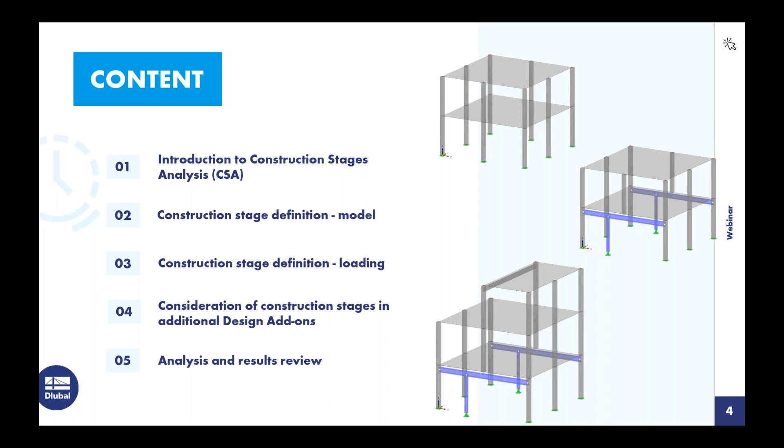So we might be wondering, why would we want to consider stage construction? Well, we know during the construction process that the structure may actually pass through several loading conditions that vary from the completed structure. For example, when we're talking about multi-level story buildings and adding each additional level on top of each other, the previous level is already undergoing deflections and stresses. So if we look at the building on the right-hand side, we set up our formwork for the first level, let the concrete cure, remove the formwork, and move on to the second level. That first level is already undergoing some of these deflection stresses from self-weight alone, or maybe some additional construction loads. So we'd like to take those into account with stage construction.

Now, regular simple structures may see very little difference when we compare the stage construction to simply applying the loads to the finished structure. However, when we're talking about multi-story buildings or structures with vertical irregularities, such as interrupted columns or walls, we might actually see a significant result difference between the finished structure versus taking into account each construction stage. The construction stage analysis add-on within RFEM allows us to compare similar structures under different modeling or loading scenarios in a single file, and we also can include nonlinearities with these comparisons. So rather than creating multiple files with the first level completed, then the first and second level completed, we can consider all of that in a single model.

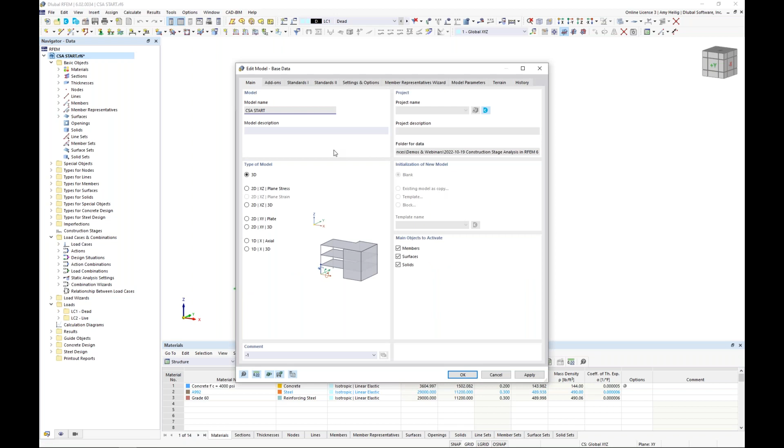Within the navigator, we access the base data. This is the same dialog box that would initially pop up when you create a new model. Under this second tab, this is where we have all of these optional add-ons.

This would allow you to essentially purchase these add-ons specific to your materials and design for your particular projects. For today, we're going to be working with the construction stages analysis add-on. You can see that's turned on here, as well as the concrete and steel design add-ons located on the right.

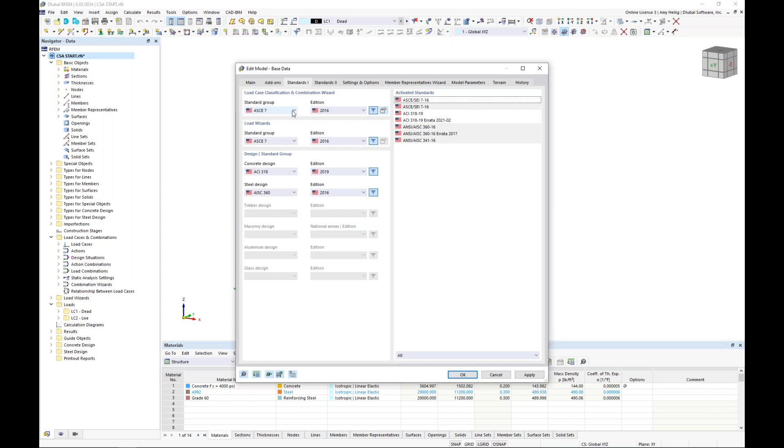Now under the third tab, this is where we set our standards. We want to generate the load combinations according to ASCE 7, which is available within this dropdown. We'll see here the NBC standard, as well as Eurocode and many other international standards.

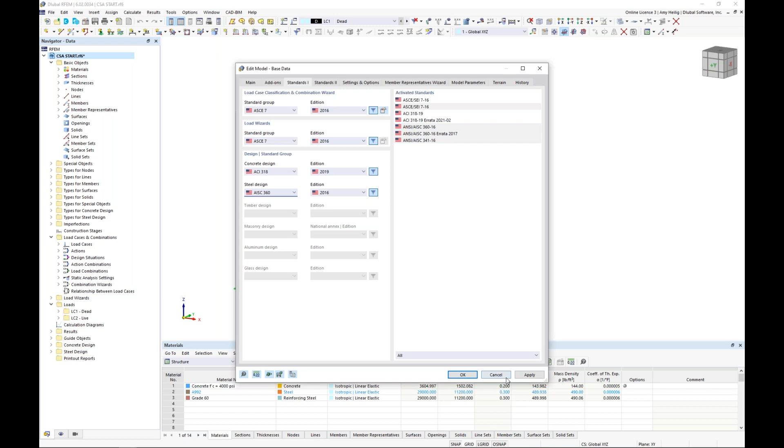As far as the concrete design, we will be using ACI 318, and steel design will be AISC 360. Using this dropdown, we can see the CSA standards available to us, as well as other international standards. Once we have verified this information under the base data, we'll go back to review some of the elements that have already been modeled.

If we take a look again at the navigator, we'll see that all of our elements are utilizing 4,000 PSI concrete. Looking at our cross section, all of my columns, if I double click on one of them, are going to be utilizing this 11-inch by 11-inch square section.

Under the second tab, we can see that the concrete material here is set to 4,000 PSI. Back under the main tab, notice that design properties is checked on. This simply means that we not only want to use this member for the analysis within the main program RFEM, but we're also going to do the design utilizing that concrete design add-on that we had turned on within our base data.

So this gives us all of the available tabs up here to define our reinforcement that will, of course, be used later on within the strength and serviceability design.

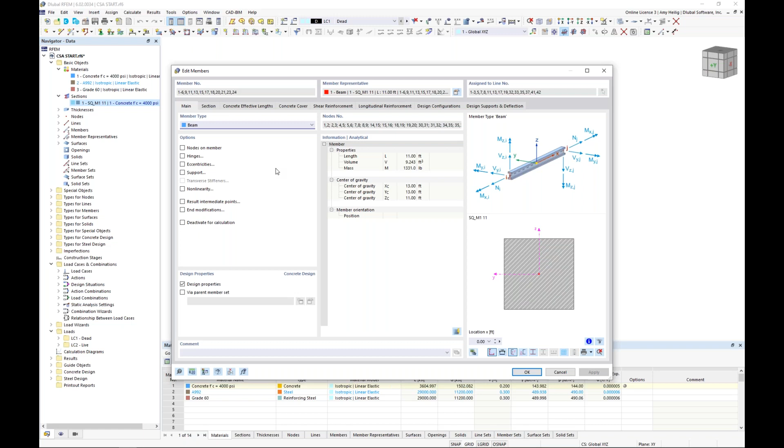Now, I'm not going to go into too much detail today. There is an additional webinar devoted entirely to concrete design according to the ACI that's available on our website and YouTube channel. So just to quickly cover this, we'll see here that we can specify the concrete cover.

For the shear reinforcement, I have defined number 3s here at 12 inches on center. And then I also have my longitudinal reinforcement, which is 12 number 6s spaced evenly around our cross section.

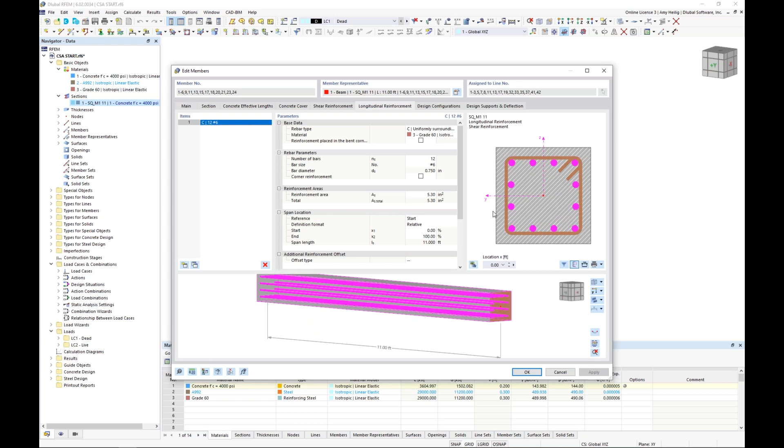This is a very similar workflow here for my surfaces as well. Each of these surfaces was defined with a thickness of 12 inches. If I double click on one of these surfaces, again we can see that thickness defined here, 12 inches, with 4,000 PSI concrete.

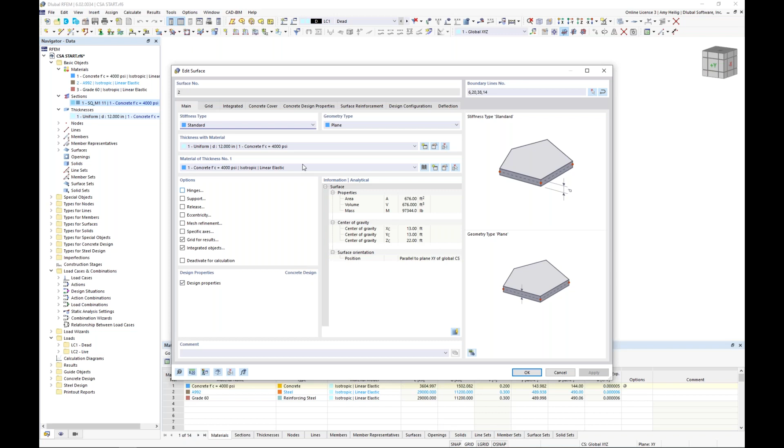Again, I've activated this design property, so we're not only using it for the analysis, but we also want to define our reinforcement for this slab to do the design later on within the concrete design add-on. We see here the concrete cover is defined, as well as the surface reinforcement.

So looking at this surface reinforcement, we can go into the details here. I have specified simply number 6s at 6 inches on center in both directions for both the top and the bottom. So very simple application for this concrete slab.

But I also have all of these additional free rectangular reinforcements defined. This allows me to place some additional reinforcement. You can see number 6s again at 6 inches, where these concrete columns are framing into this slab. So rather than applying to the entire surface, we apply to what we call this free rectangular location.

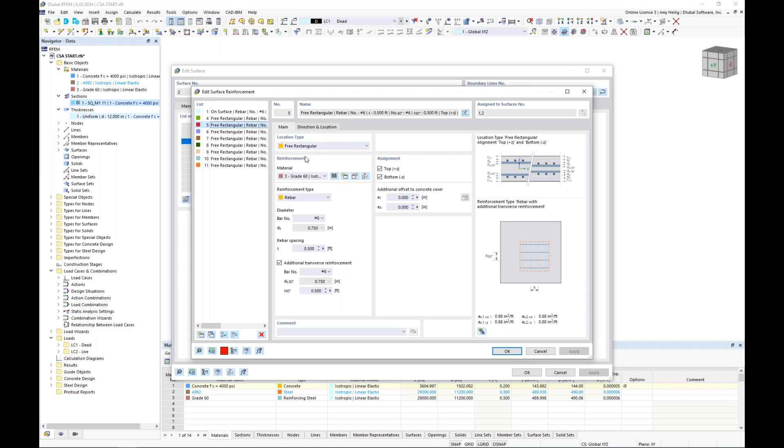So once we have defined all of our reinforcement here, what is actually turned on by default, if we go to our Views tab within our navigator, up here under the Types for Concrete Design, and maybe I turn this into wireframe view, we can actually see the reinforcement here displayed graphically.

So we see our shear and longitudinal reinforcement for our concrete columns. And then, as I mentioned, those slab elements, we have our number 6s at 6 inches on center, but we also have some additional reinforcement here where those columns are framing into the slab.

So we can always turn off this display just to get a little bit of a cleaner look here.

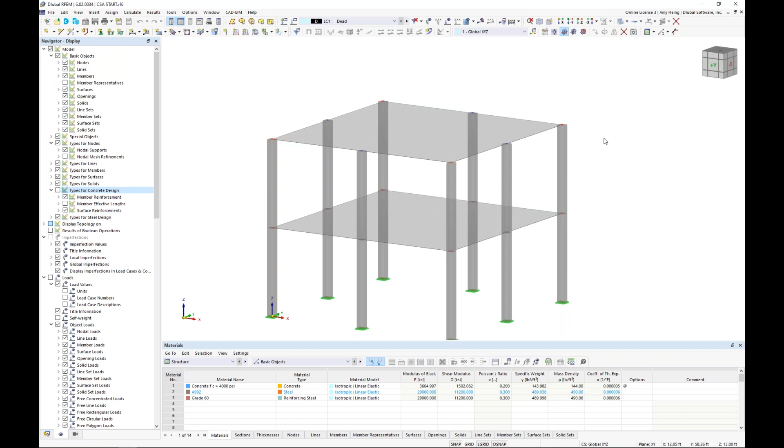Now, additionally, what else I have hidden, which I will turn on now, is the mesh refinements. So I've added these FE mesh refinements, you can see by these symbols here at the tops of each of the columns. So we know that within the program, we're likely going to get what we call singularities, where these single line elements, which are essentially our members here, frame into these slab elements at a single FE mesh point.

So I'd like to refine the FE mesh here, which you can see I have gone ahead and done with a nodal mesh refinement.

Additionally, what I have defined, which we'll find under the result objects, is what we call surface result adjustments. Now we can see all of those displayed at the tops of our columns. If I double click on one of these, we have the ability to average out the internal forces over a set area. Again, this just helps smooth out those singularity areas.

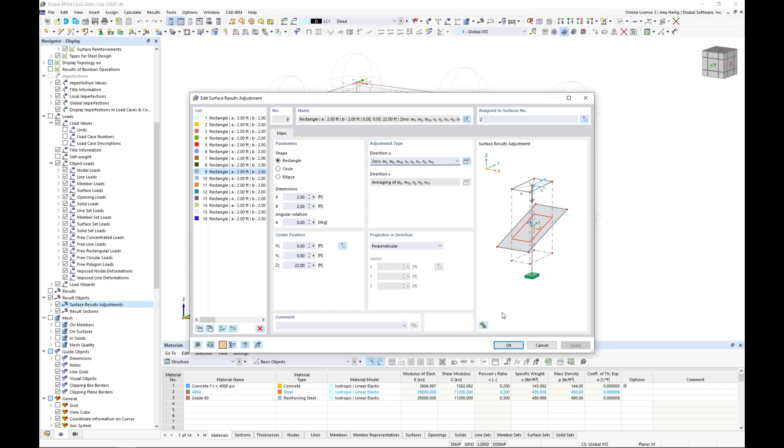For my simple example today, I actually just zeroed out those internal forces at those locations. They're not really a concern for our simple example, so I went ahead and set that as the definition type for these surface result adjustments. Again, all of this is just to help with those singularity issues. So we'll go ahead and turn those off.

These will come into play a little bit later on, but for now we will turn this back into the rendered view. So this is my starting structure, just simple two-level concrete elements.

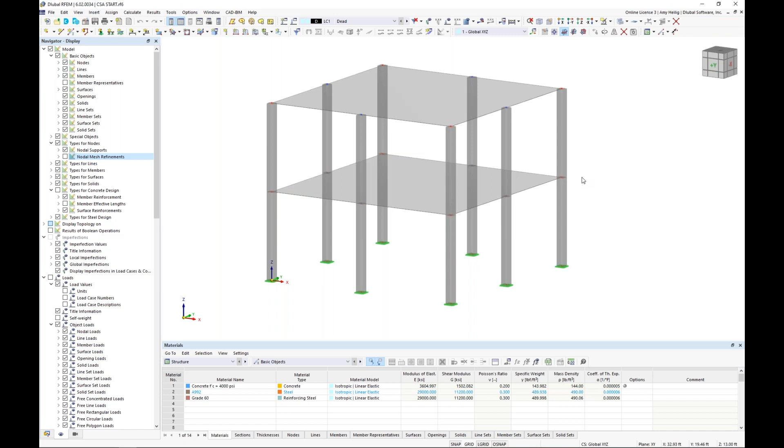Ultimately what I'd like to do is remove these center two columns here on the first floor. Instead of these center two columns of this existing structure, I'm going to add in some steel beams that span between these exterior columns underneath the slab, as well as an additional couple of steel columns that are slightly offset from the center of the structure.

So we're going to deactivate these columns and instead add in some steel members, which will just describe the workflow here of our staged analysis. Before we define any of these construction stages, we need to ensure that we have everything completely modeled in RFEM. So we will begin by drawing a new member here, and up in my quick toolbar, I can draw a new single member.

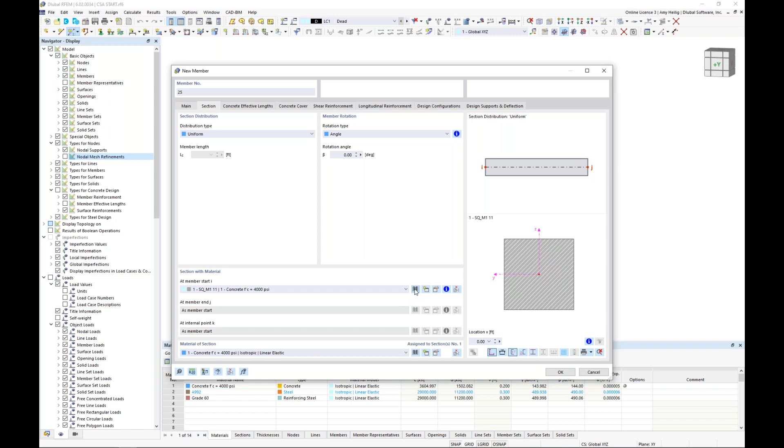Now under the section tab, I want to define a new cross-section by visiting my cross-section library, and we can see all of the various sections we have available to us, including the parametric sections, where we just simply input in the dimensions and the cross-section properties are calculated automatically.

Now alternatively, we can view these standardized sections. For example, we can activate our I-beams. We can use our filters on the left to filter to the United States and to the AISC 15, and I want my beam section to be a W14 by 82. So I scroll down here to my list, I select the 14 by 82.

Of course we don't want this to be a concrete material, so what we'd want to do then is activate our material library for this particular section. Once we launch our material library, again we can use our filters on the left to filter to the material type steel, and then we can set the standard to the AISC 360, and we'll see here steel A992.

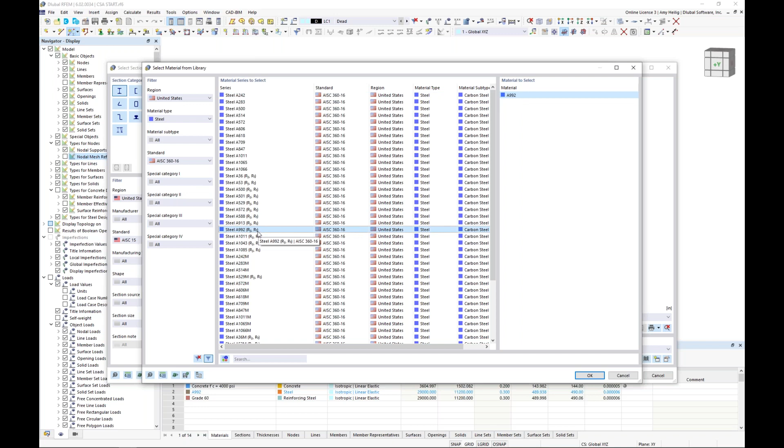Now for me, I already have this steel material defined within this model. So rather than redefining a new material every time, I now can just select it here within my dropdown. So I can select material number 2, A992, and our beam has now been defined with the correct cross-section as well as the material properties.

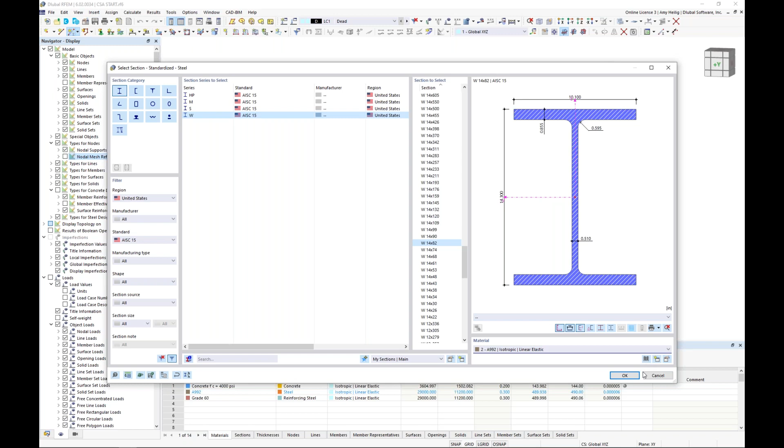So in addition to defining the cross-section and material, notice that the design properties is turned on here as well, but we're no longer referencing the concrete design add-on that we activated under the base data, but we're now referencing the steel design add-on. Before I draw these members, I also want to activate here a couple other options, including hinges and eccentricities.

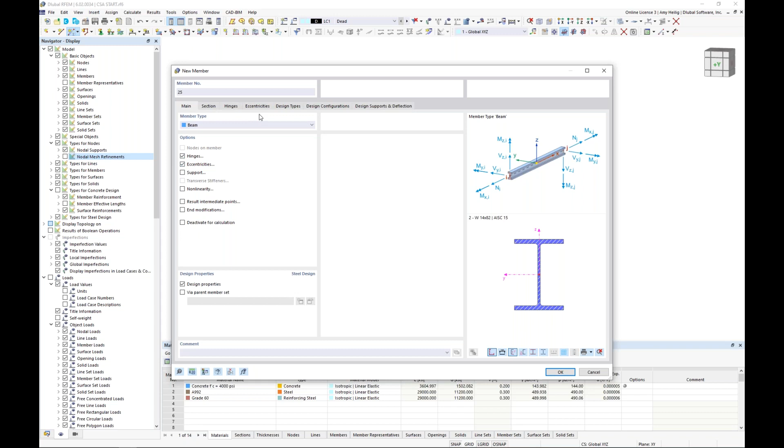So notice we have two additional tabs here up at the top. Remember that everything within RFEM is considered fully fixed. So if we want to release a moment, for example, at the ends of the member, we do need to define a new member hinge. So we do so by activating the hinges. We create this new definition type.

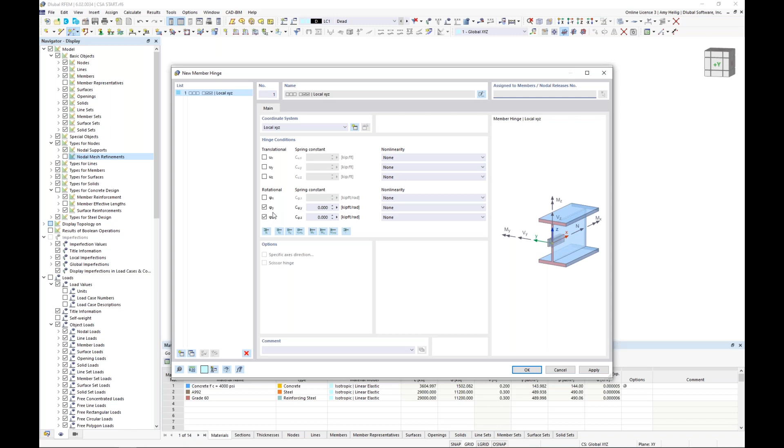And the program is automatically going to assume that I'd like to release the moments based on the local Y and local Z axes of the member. So this is a member end moment release here. I click OK. Now I've applied that to the member start. Rather than redefining for the member end, I can now simply select it here from my dropdown. So we'll go ahead and release the moment at either end of this particular section.

Now the eccentricities is a very similar workflow. We want to define a new member eccentricity here. And I'm going to use this option within my dropdown relative to section.

I'll tell the program to take the topmost point of my cross section, and I want to offset it from an additional object that already exists within my model. I'll select the option surface, and then graphically select surface number 1. I want to drop this beam member down below the bottommost point of this surface.

The advantage of using this option relative to section is that if I make any changes to my cross section size, or changes to the thickness of my surface, this eccentricity will automatically update. I don't have to come back and adjust it manually.

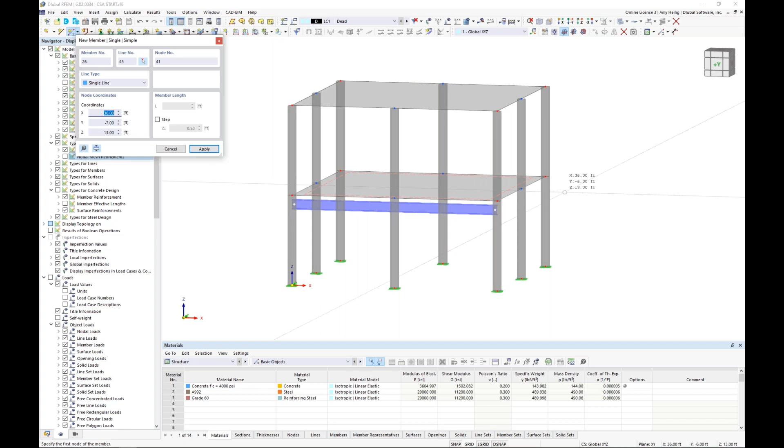We applied that eccentricity definition to the member start, and we also want to apply it to the member end. Now that we've defined the hinges and eccentricities, I click OK, and I'll snap from the right-hand column to the left-hand column at the front of the structure, and do the same at the back. Now we can see this steel beam drop down below the surface. It's intersecting these concrete columns, but that's fine—we'll make these changes later with the construction stages so that both don't exist together.

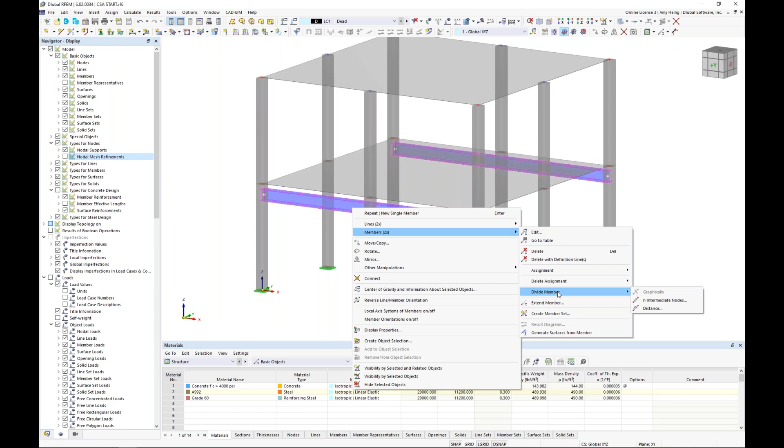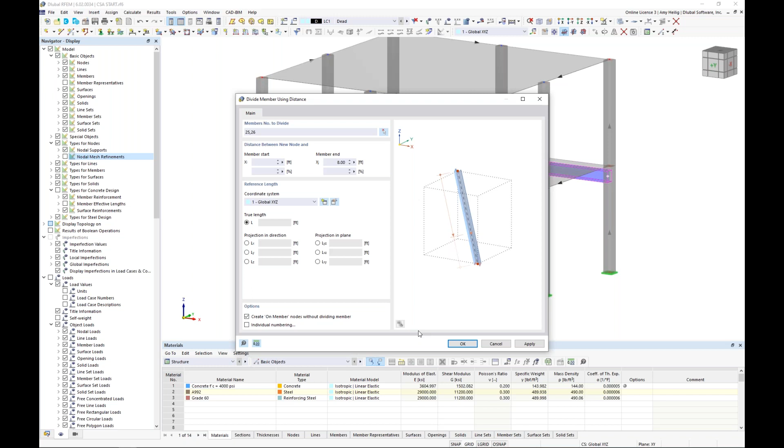I'll hold down my control key and select both of these members, right click, and under the member option, divide the member by a set distance. I want to add a node along the member 8 feet from the member end, but instead of dividing the member, I'll turn on this checkbox to create the node without dividing it. When I click OK and switch to wireframe view, you'll see this is still one continuous member, but now we have a couple of nodes defined along the member length.

These nodes are special in the sense that they're of the type 'on member,' and the program automatically detects which member it should be integrated with. This allows me to draw in my steel columns that will frame into these steel beams.

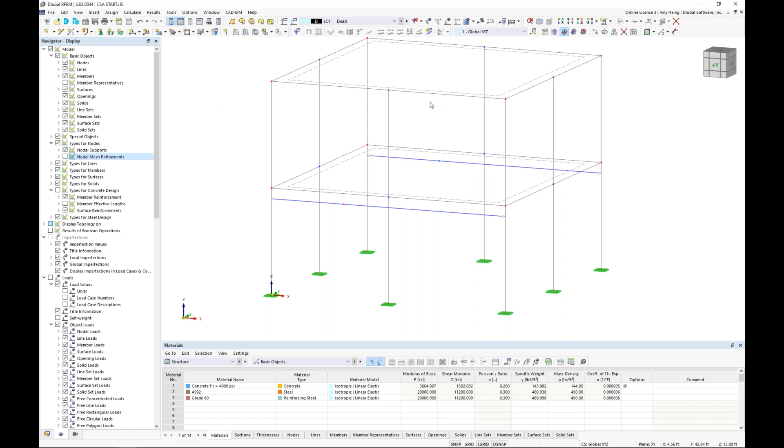I'll begin by adjusting my drawing work grid—we can turn this on at the bottom of the page, and also adjust the plane. I'll create a new cross section; the member type is set to beam, and the section will be defined from my section library. In these standardized sections, I want to select a W8 by 35. I already have my A992 material defined within the model, so I can select that here.

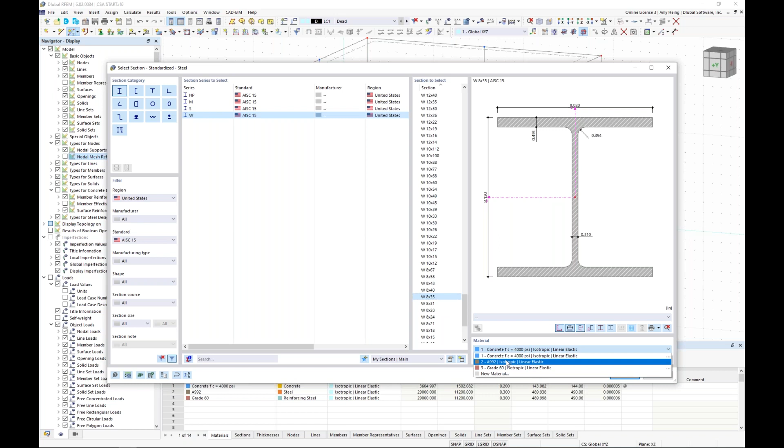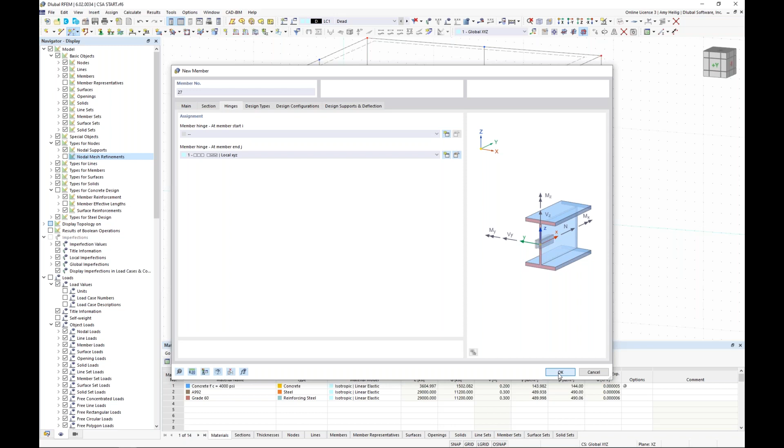I click OK. One thing we'd like to add here is also a hinge definition. Under my hinge tab, I already have that moment release defined, so I can select it from my dropdown to release the moment at the member end. I click OK, then snap from the bottom of the structure up to that node that was created, and right click to exit this dialog box.

If we take this element, we can highlight it, hold down our control key, and drag and drop it to the rear of the structure to create that additional column.

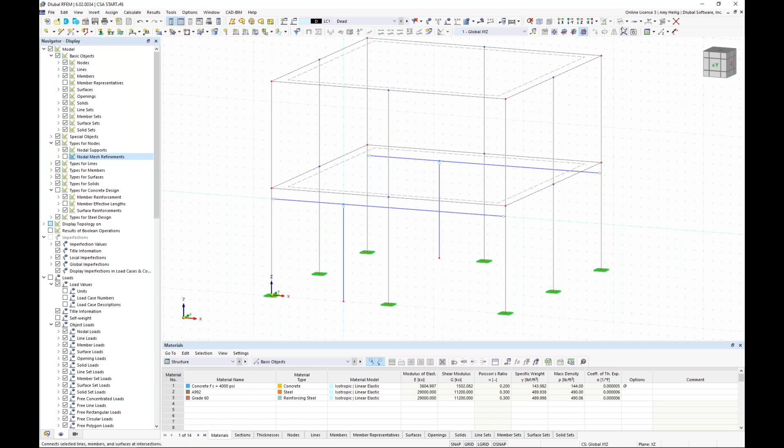Now that these two columns have been generated, there are a few additional things to consider. First, we need to add some supports at the bottom, so we'll add a new nodal support. We'll use one of the default definition types here, hinged, and click at the bottom of these steel columns to add in that nodal support.

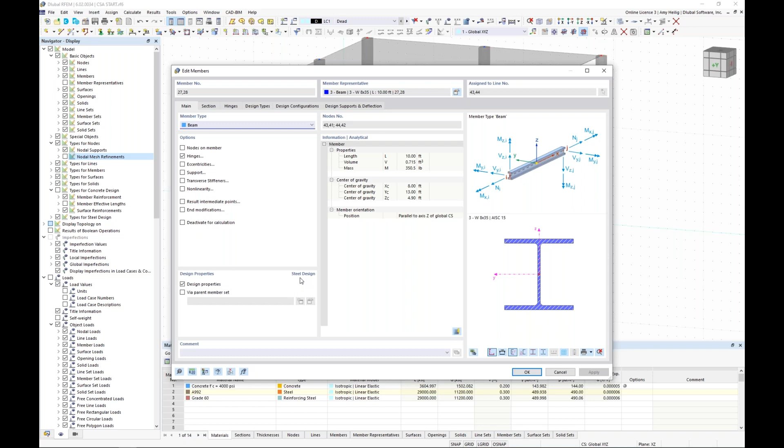The second topic: holding down my control key to select both columns. Remember, we're going to design these members using the steel design add-on at the end of this example. One thing required for that is defining information like the unbraced lengths, which we do under the design types effective lengths. I have an additional webinar devoted entirely to steel design according to the AISC that goes into much more detail on unbraced or effective lengths.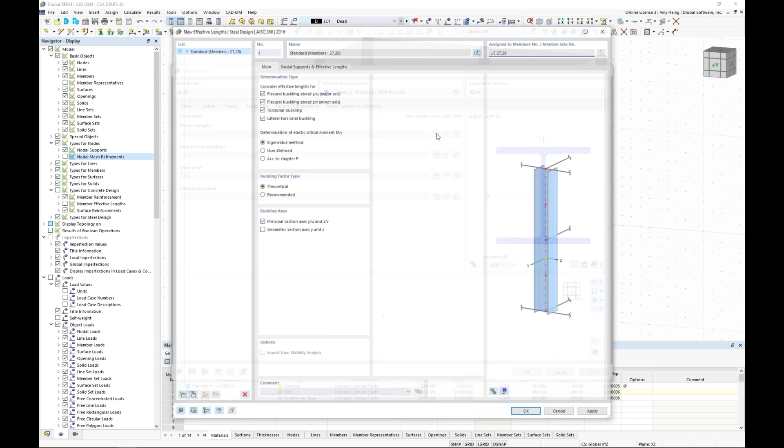We'll quickly add in these intermediate supports that are going to be applied for flexural buckling, torsional buckling, and lateral torsional buckling. Under this second tab, the default option is to add in this intermediate support at the member start and member end.

And now my unbraced lengths for my stability design will default to the full member length. So when I click OK, you can now see that we go back into the model and the unbraced lengths have now been defined here for these particular elements.

Now we need to do the exact same thing here for our beam elements. So we'll go ahead and select both of these elements, and under the design types here, we define a new effective length. But this time, the slight difference is I want the program to go ahead and detect these intermediate nodes, and in particular where this steel column frames up into the steel beam, where I can add an intermediate support in the vertical direction. So now the program will consider this with the effective lengths or the unbraced lengths for our stability design.

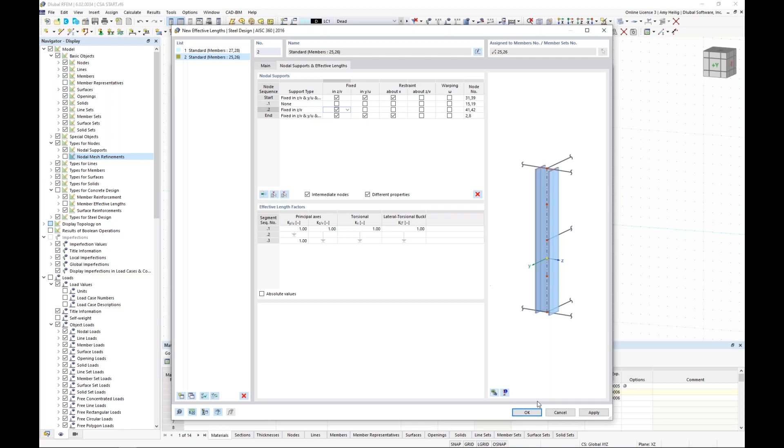Okay, so that takes care of the unbraced lengths, which will again come into play a little bit later on for our actual steel design according to the AISC.

The final topic here related to this first story is that currently this slab element is entirely connected to this steel beam. So full force transmission, full moment transmission between these two elements.

Now, if we would like to release some of those degrees of freedom, what we can do is consider what we call a new line hinge. So under the option here, types for lines, we expand this folder and we see a line hinge where we can right click to create a new definition type.

With this line hinge, I'm actually going to release all degrees of freedom. So we have 3 in translation based on the local X, Y, and Z axes, and 1 in rotation. Keep in mind that these are based on the local axes of the line element itself, not the local axes of the surface or of the member. Each line has its own X, Y, and Z axes.

But rather than keeping these as fully released, we want to add in a nonlinearity. This nonlinearity will allow the slab to bear down on the beam when we have this downward deflection. So if we have a negative shear value in the local Z direction, then we should see full fixity. But if we have uplift, then that relationship between the slab and the beam will be released. So again, applying this nonlinear behavior here to this line hinge.

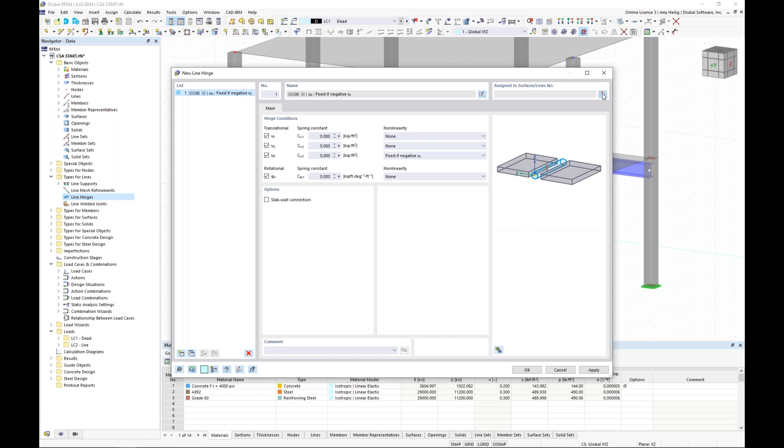Once we have the definition type presented, we want to actually apply it to the model, and we do so by first selecting the surface that we want to apply the line hinge to. Then we select the lines, choosing the front line number 12 concurrently with the back line number 18. We click OK, we click OK. We can zoom in here and see a very small symbol for that line hinge definition.

Again, this will also come into play with our construction stages. So we're now complete with this first story.

The final thing that I want to do with this model is to actually add in a third story, a partial third story. So before we do that, I'm going to go back to the nodal mesh refinements, turn back on my concrete reinforcement and also those surface result adjustments. I'm doing so because when they're graphically displayed, this will ensure that when I copy all of these elements to the third story, all of these details are also copied.

So we can go ahead and highlight this top story here, including the reinforcements, mesh refinements, and so on. Normally we could use this simple drag and drop copy that I showed you with my steel columns.

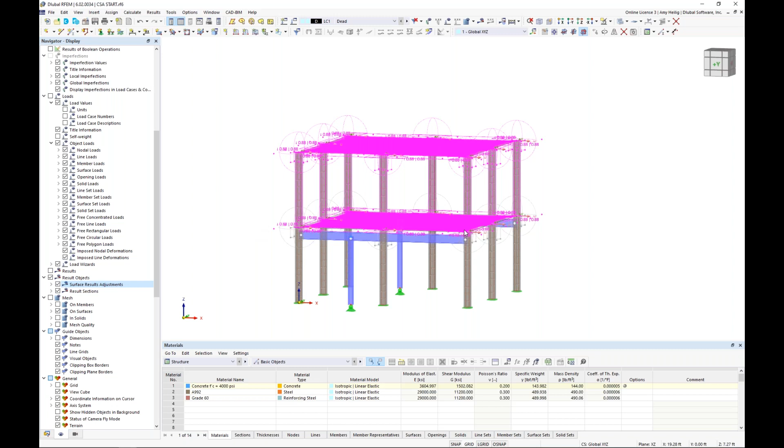But I want to take advantage here of the Move Copy tool for a specific reason. So we're going to create a copy of that second story, and I can either type in my displacement vector or use this measurement tool. I can snap to the bottom of that second story to the top, and we see the program automatically detects this is 11 feet in the Z direction.

But under the numbering and options, I have the ability to not only copy all of the elements, but also the loading. So I have some existing loading on the structure for dead load and live load, which we'll visit in just a few minutes.

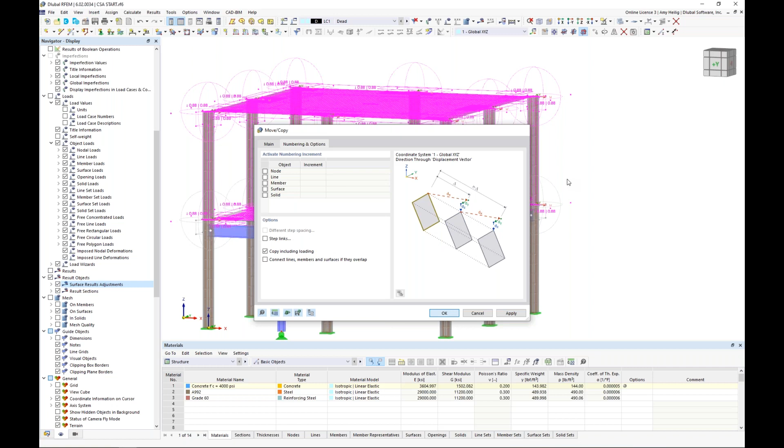By activating this checkbox, all of those loads will also be copied. So I'll click OK, and what we should see is the addition of this third story.

Now for this third story, I actually want it to only be a partial third story. So we'll need to clean this up slightly. I can do so by holding down my control key to select the top nodes of these columns, hit delete on my keyboard, and now all of those columns are gone. I'm also going to hold down my control key to select my columns as well as the nodal point at the tops of the columns, and I'm going to use my Move Copy tool again.

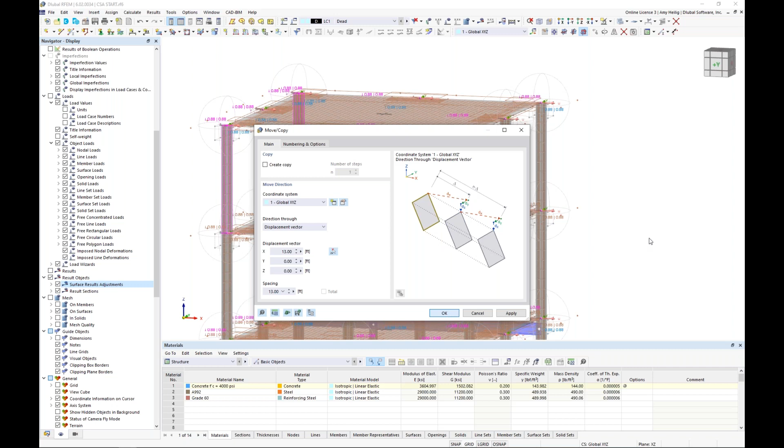But instead of creating a copy here, we'll uncheck this—I want to use my displacement vector. I'll select from the left-hand side of the structure because I want to move those columns to the center of the structure, so a displacement vector of 13 feet. Now when I click OK, what we should see is that partial third story.

Notice that all of my reinforcement was copied as well, and it's somewhat adjusted since I essentially shrunk down this third story to a partial third story rather than the entire area. Back under my navigator, we can see the types for concrete design and all of my surface reinforcement listed. The program was intelligent enough to apply the same reinforcement to that third story—our number 6 bar at 6 inches on center, and our free rectangular reinforcement defined for that third story.

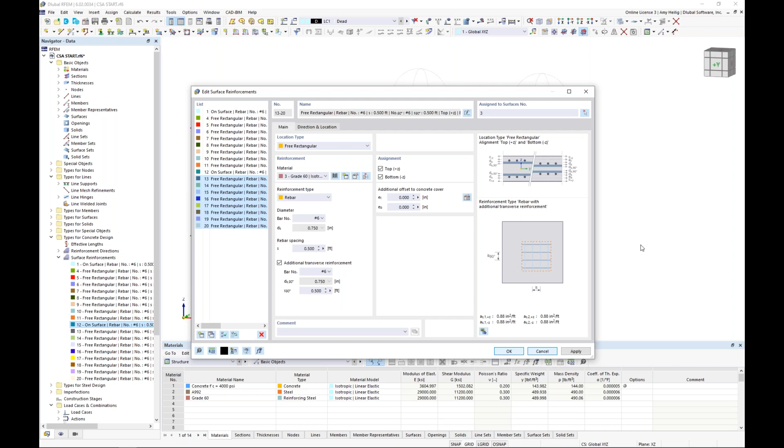So we can make modifications here if we're not needing such close spacing, or if we want to change our bar diameter, we can do so. But for this example, I'll leave everything as is. So all of this information here, we can simply highlight and hit delete on our keyboard.

So essentially the modeling is now complete for this structure. Again, before we define those construction stages, we need to ensure that everything is fully modeled within RFEM itself. So I want to turn off the nodal mesh refinements, my reinforcement, and those surface result adjustments just for a cleaner look. Now we're finally ready to begin with our construction stage definition.

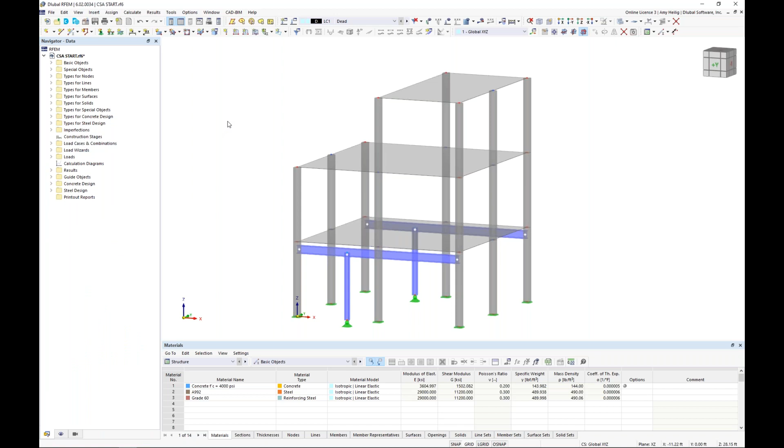Back in my navigator, we have a nice feature—if I right click, I can collapse all of these folders. Actually, there's one more thing I forgot before we define our construction stages: maybe we wanted to apply a quick rib element that spans between these columns. Just to introduce you to this rib type, we can draw in a new single member, and we can see the member type would be set to rib.

What's special about a rib is we can integrate it with the slab, so those internal forces will now include the internal forces from the slab for some effective width that we define. We can also turn on the design properties to design this as a T-beam, including the reinforcement in the concrete design add-on. For today, I'm not interested in designing it, so I'll simply turn this off—I only want to consider it for the analysis. Notice all my tabs to define my reinforcement are now gone.

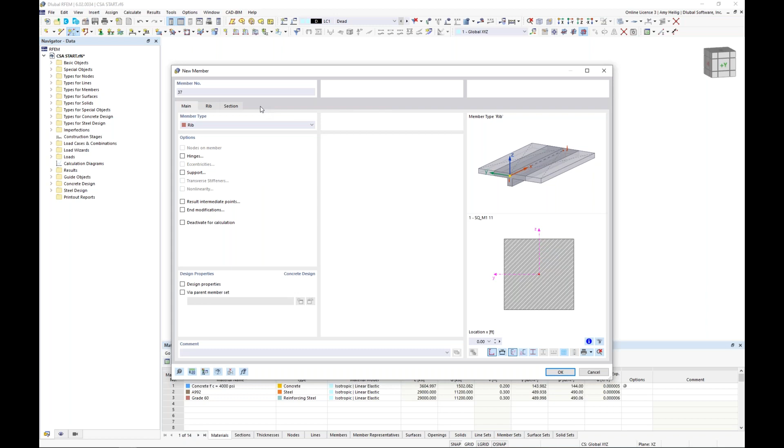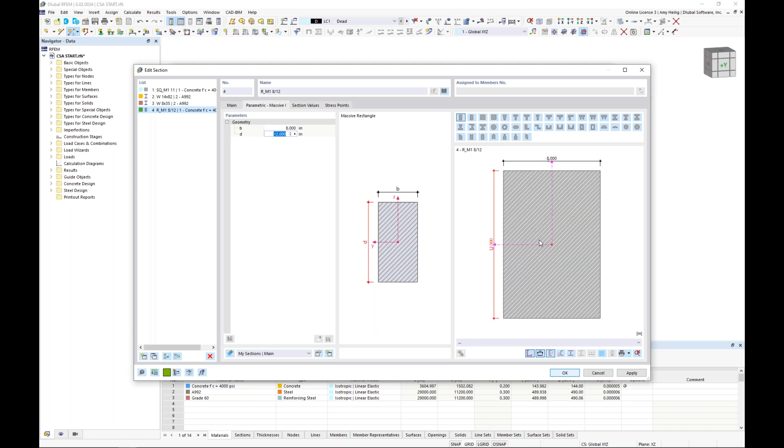Under the section, we will create a new cross-section type for the last time, and we'll choose this massive rectangular section, where under the second tab I can quickly choose my dimensions and type in directly 8 by 12 inches for this rib element. 4,000 PSI concrete is already defined, and under this second tab, we want to drop this down below the negative Z direction of the surface element itself.

So when we click OK, we can actually draw in this rib element from right to left. Again, internally we are including the effective width of this element. If we revisit the rib section, we can actually see that drawn graphically.

Okay, so now we are done with all of the modeling within the RFEM program. So we can move on to the construction stages. We've collapsed all of these folders just to make this a little bit more visible. You'll see here the construction stages option—this is only available because we activated that construction stages analysis add-on under our base data.

So we will start here by right-clicking to create a new construction stage. You can see the program defaults construction stage number 1 and gives it the name of start. We can override that name if we'd like, but we need to tell the program which elements are active for this first stage.

We'll begin with our members, our surfaces, as well as our nodal supports, and we get additional tabs up here. I did want to point out this option that's grayed out for the time-dependent analysis. This is still in development. Eventually we will link the construction stages analysis to our additional add-on for time-dependent analysis to take into consideration topics like creep and shrinkage, but for now this is still in development.

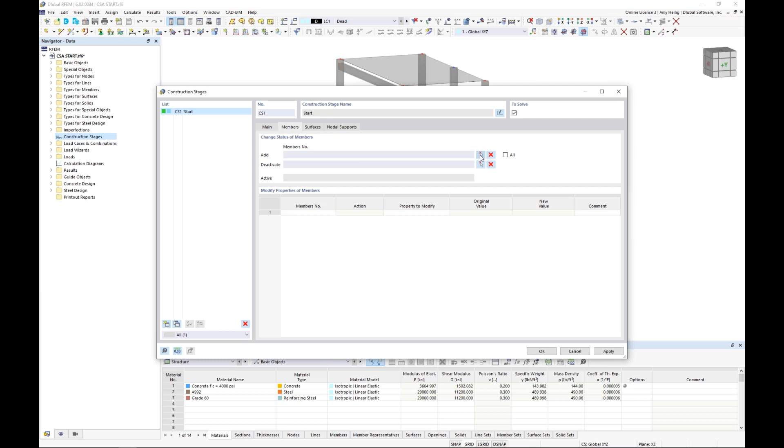Under these additional tabs, what we would like to do is add in the initial elements for that first stage, and we begin with our concrete columns. So down here at this first level, I'm going to select all of my concrete columns, and notice I'm making sure that I'm not selecting any of these steel elements yet. For my second floor, I select all of my concrete columns here as well.

I click OK. My surfaces, I want to activate surface number 1 and surface number 2, and I click OK. Finally, for my nodal supports, I want to activate the nodal supports at the base of these concrete columns. Again, I am not selecting the nodal supports of my steel elements, and I click OK. So my first stage definition is complete.

I'd like to create my second stage definition here, and I can do so within the lower left corner, number 2. You can see here that I again have the ability to override the name, so if I'd like to rename this one, we can call it Add Steel Members.

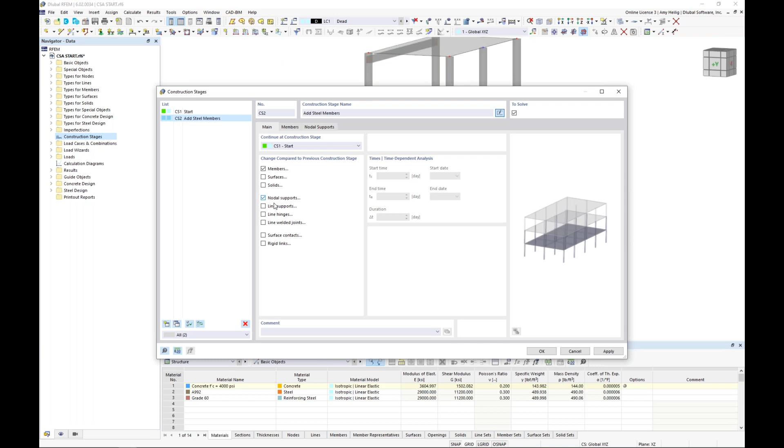I want to activate here my members. I'm actually not making any changes to my surfaces, so we can leave this active, but for simplicity we can also turn it off since we're making no changes. We can go ahead and select the nodal supports. And remember, we also added in those nonlinear line hinges, so we want to activate this here as well.

Now under the members, this is where we want to deactivate those center concrete columns. So I select graphically members number 9 and 13. At the same time, I'm going to activate all of my steel members, so I can graphically select all 4 of these steel members. This entire process is going to be completed here within this second construction stage.

Now by all means, we could have certainly separated out these options into two stages. Perhaps we'd like to deactivate our concrete columns first in one stage and then an additional stage to add in the steel beams. It all just depends on how your construction stage workflow is for your particular project. But for me, I just define these all in one stage, so that will happen simultaneously.

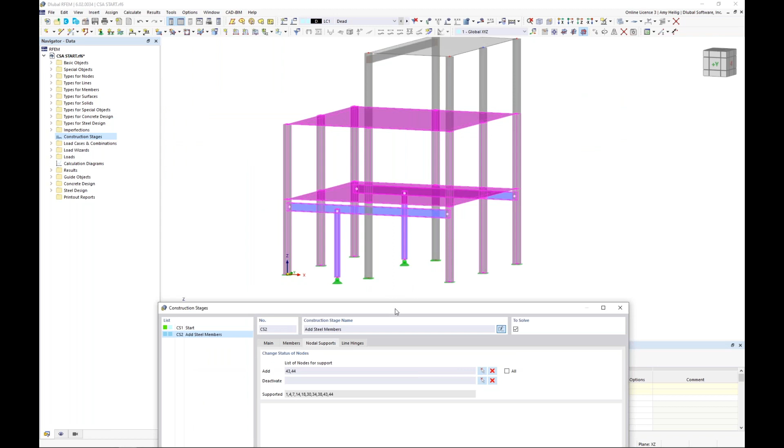Now the nodal supports, we do need to add in the pin nodal supports at the base of the steel columns, so we go ahead and select those. I don't need to worry about deactivating the supports at the bottom of the concrete columns. In fact, the program won't even let me because it says these members no longer exist, so those supports are no longer active either.

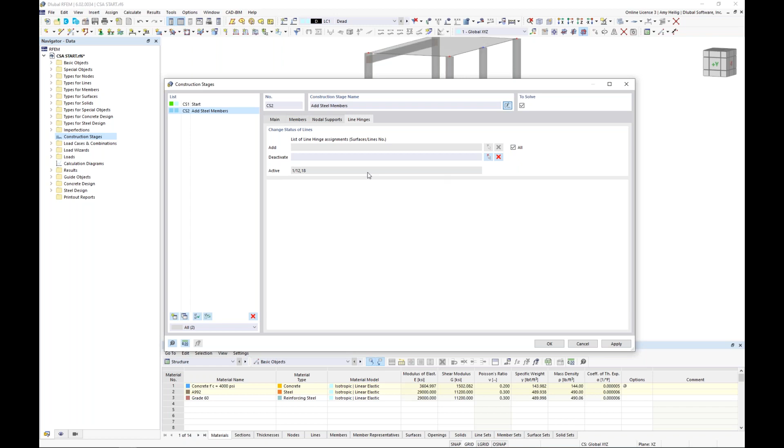Now finally we also have the line hinges, so I can graphically select the line hinges, or alternatively I can just simply hit this all checkbox. We only have one line hinge definition in the entire model, so this option all will go ahead and activate all line hinges here. This will complete our second construction stage.

Now the final stage, which we again go down here to the lower left corner, and we want to rename this one to Add Third Story. The options here to activate, we want to leave on the members, we also want to activate the surfaces, but everything else can be unchecked. For our members, we want to of course add in all of our concrete columns and even that rib element here at that third story.

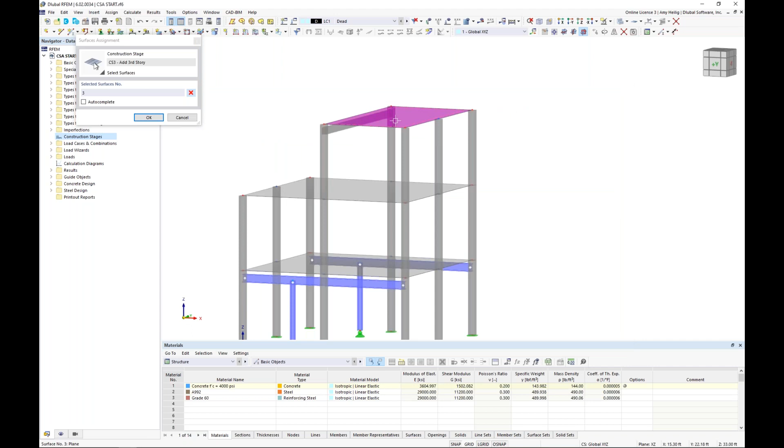I click OK, and then my surfaces, I could either type in directly surface number 3 or I can graphically select it here. This sums up my construction stage definitions. So once I am done defining all 3 of these stages, I can click OK. And what you'll actually see here at our dropdown is each of these construction stages presented to us where we can graphically see what's going on.

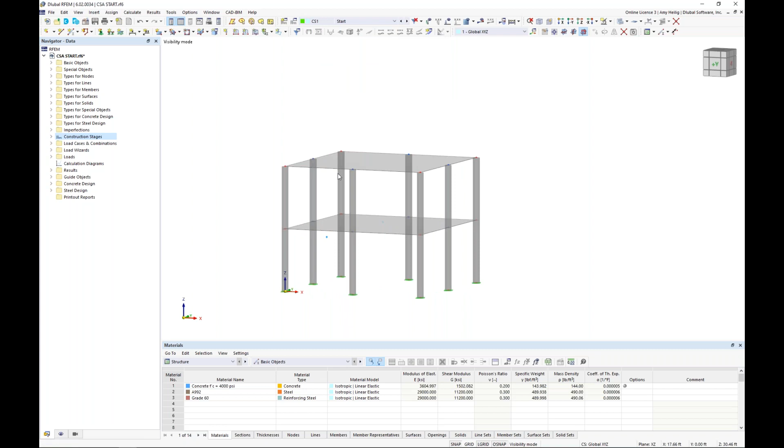So here's stage number 1. Here is stage number 2. Notice those 2 concrete columns are gone. We've added in our steel elements. And finally, we have the addition of the third story. So this will sum up the construction stage definition from the modeling point of view.

But now we need to move on to the loading. How can we integrate the load cases as well as combinations to these various construction stages?

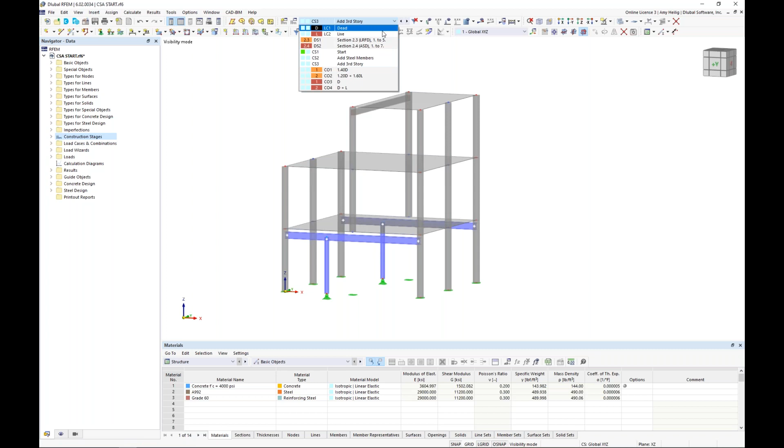I want to point out first that I have already applied 2 very simple load cases to our model today. If I activate my dead load and turn on the display of these loads, just simple surface loads apply to all 3 levels. Remember, when we copied this third level, the loads were also copied. So just a simple 35 pounds per square foot for our dead load. Same concept for our live loads, slightly different magnitude here of 40 pounds per square foot applied at each level.

Now, of course, for a project in real life, we'd probably want to add in wind loads, snow loads, whatever else it may be. But for this simple example, we only have these dead and live loads.

So I'm going to access my load cases and combinations dialog box, and we see here these 2 load cases listed. Dead load, which notice self-weight is automatically turned on here with the action category set to dead load directly from the ASCE 7. The second load case is live load, again with the action category set to live.

So if we want to back this up just a step, remember under the base data, which we had modified at the beginning of this example, I told the program I want to generate my load combinations automatically according to the ASCE 7. Of course, we can make changes here within this dialog box if we wanted to change to the NBC or any other standard. But when this option is turned on to generate the load combinations automatically utilizing this combination wizard, the program will reference the selected standard to automatically create those load combinations.

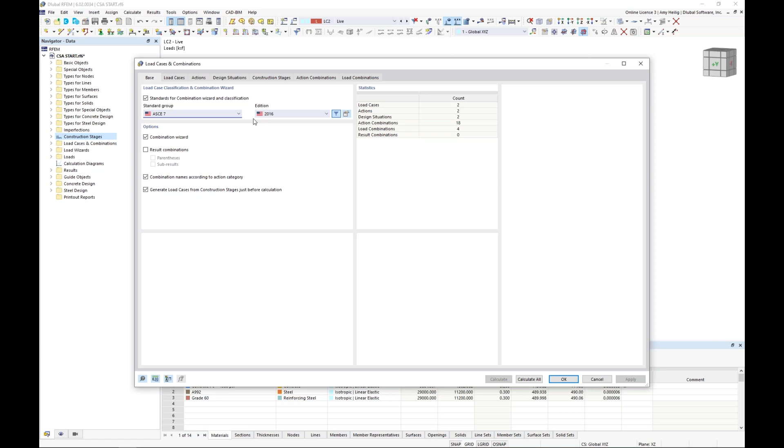So let us take a look at the design situations. Now, the design situations are absolutely needed when we want to do design in the various add-ons. We have activated the concrete design add-on and the steel design add-on, and we'll see a little bit later on why we need these design situations.

The design situations essentially encompass all of our load combinations. So we have two of them here. We have our LRFD design situations from the ASCE 7. This is going to be all of our factored load combinations, again, directly from the standard. And we have a second design situation for ASD, or this is going to be our unfactored load combinations. Again, we can just reference here to see exactly what they look like according to the standard.

Now, if we take a look at the load combinations tab, here are my individual load combinations strictly for those dead and live loads, since I don't have any additional load cases defined. And I have two factored load combinations that belong to that LRFD design situation shown here in orange. And I have two unfactored load combinations that belong to my ASD design situation.

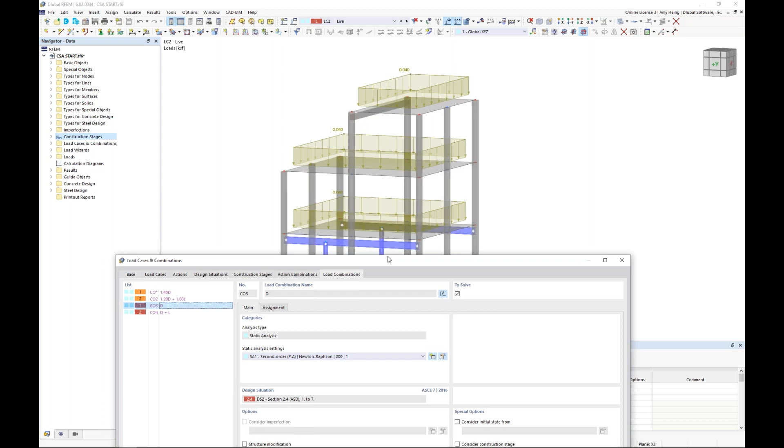Now, if I was applying the conventional method here of applying all of these dead loads and live loads to my structure, again on the finished structure with the third story and the steel members, then we would just go ahead and move on with the calculation utilizing these load combinations. But currently, they are not referencing those various construction stages.

So what we want to do here is to go to the construction stages tab. And here we see our 3 stages that we have already defined, which are automatically brought into this dialog box. Now notice that each one of these stages will go ahead and reference the previous stage. So it says continue at construction stage number 1 for number 2. And then of course, if we look at our third stage, it's referencing number 2.

A couple other options to point out here. The construction stage analysis is done according to the load combinations. This is grayed out. The reason why is because this is also in development, as in the future we plan to add in the option for load cases and a result combination using linear superposition. This would be for linear structures where we don't necessarily have to incorporate the construction stages into each load combination, but rather we superimpose the results on the finished structure utilizing a result combination instead.

So this could be a really powerful increased performance for multi-level story structures. Maybe we have hundreds of load combinations, so this will essentially be very efficient. But for now, it's still in development, so that's why this option is grayed out.

Now, the static analysis setting, this is really important. You can see here that my construction stages right now are set to second order. If I go into the detail settings here, we could change this to first order, second order, or third order.

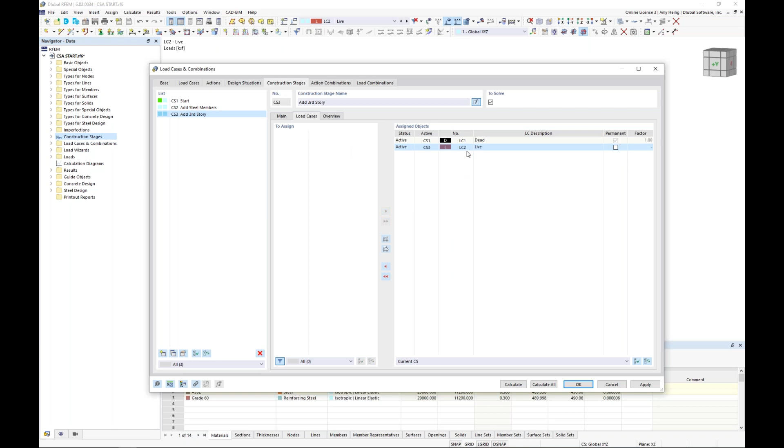And finally, we have our third construction stage where we've added in that third story, and dead load is already automatically included. It has to be because of that permanent checkbox here, but I'm going to factor back in my live load here. So now we have allocated each one of these load cases to the construction stage.

The final thing to do here is to tell the program to create the combinations utilizing the construction stages as well as the combination wizard. So I turn on this checkbox here and I go into the detail settings and I'm going to tell the program, don't consider the normal load combinations that we previously saw. Rather, just consider the construction stages only. I'm not concerned with the final structure and applying those loads with the conventional method.

And I click OK. And then we can just simply turn on this checkbox here for the rest of these stages. This checkbox is already turned on if we go into the detail settings because it's part of this combination wizard definition type number 1 here.

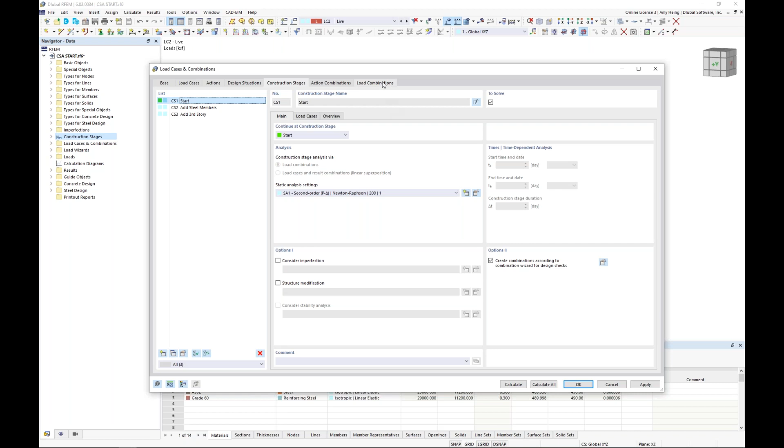So now that we have selected this checkbox, we should see slightly different load combinations shown under this last tab, and sure enough, we do. Notice that we have our factored load combinations, part of that first design situation, but they are now considering the construction stages. So for stage number 1, we have 1.4 dead load. For combination number 2, still construction stage number 1, we are now also considering the live load, so dead load plus the live load. If I look at construction stage number 2, I'm only considering the dead load, so 1.4 dead. Remember, live load I did not incorporate into this particular stage.

Notice that on the right-hand side, for the initial state, the program considers the previous construction stage. You can see load combination number 1 takes into consideration those strains and stresses the structure is already undergoing from construction stage 1, applying this to construction stage 2 for this load combination. Same concept for construction stage 3: the initial state is set, but we're also factoring back in our live load, so we see 2 additional load combinations here. Same concept for my unfactored load combinations that are part of this second design situation, my ASD design situation.

Now we see a couple of grayed out load cases at the bottom, and we might wonder what those are for. They're not part of any design situation. We might call these our auxiliary load combinations, that the program internally creates because it needs to solve this as an initial state for some of the load combinations listed above. For example, this auxiliary load combination is used in load combination number 5. So it depends on your particular situation, but if you see these grayed out load combinations, internally the program is using them, but they will not be part of our analysis or design. It's purely for these initial state options, factoring in the construction stages with our load combinations.

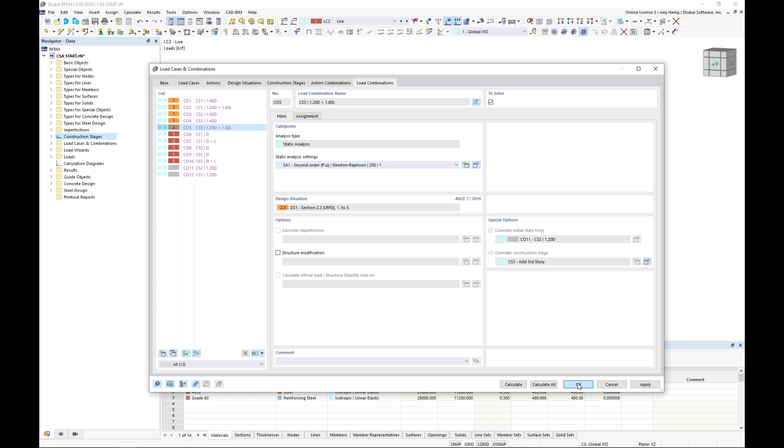Now that we are done defining the load combinations, considering the construction stages, we're finally ready to run an analysis. Before we run the analysis, what's also nice is that in my dropdown I see all of those load combinations listed, and I can actually cycle through them.

Here's load combination number 1 with my dead load. Here's dead plus live. Here's my second construction stage, again only with the dead load. Then I move on to the addition of that third story with the dead load consideration, and then dead plus live. So the program's automatically combining all of these together.

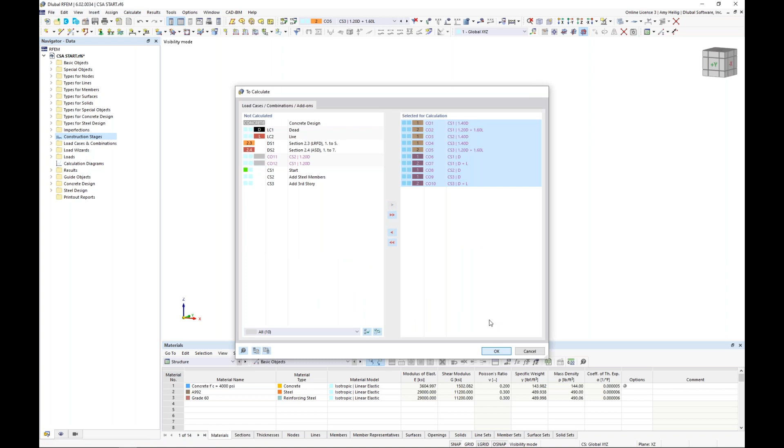Under calculate, we go to the option to calculate, and I'm going to select only my valid load combinations to move over to the right-hand side. When I click OK, the program is going to generate the FE mesh, and then new within RFEM 6 is this multi-core processor where we can solve load combinations simultaneously for a little bit quicker analysis.

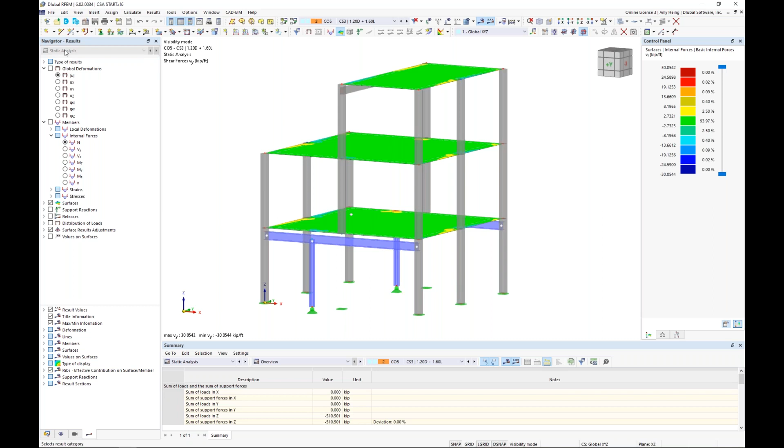Once the program is done solving for all of these load combinations, we're now presented with the static analysis results—no design yet, just purely the analysis portion within RFEM itself. We can see our results available to us in our navigator. For example, we're looking at load combination number 5, and we can view the global deformations of the structure.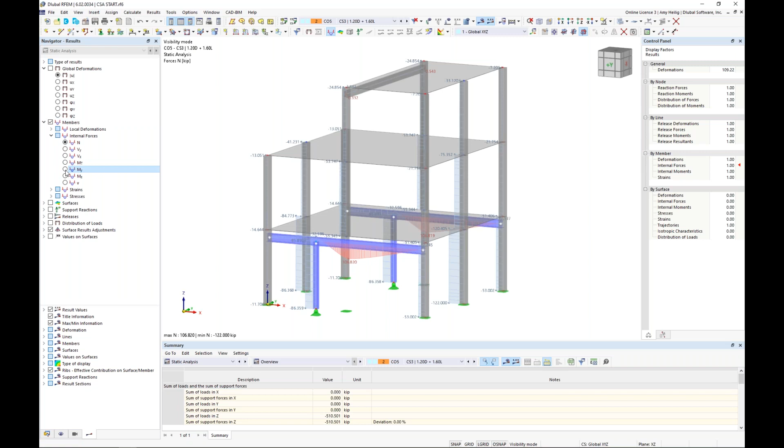We also can take a look at the member internal forces, for example the axial forces, or maybe the bending moments for our beam elements. All of this is visible based on the various load combinations that have factored in these stages. Of course, we also have our surface results where we can view the bending moments, MX, MY, and shear forces. This is obviously for my initial structure, stage number 1.

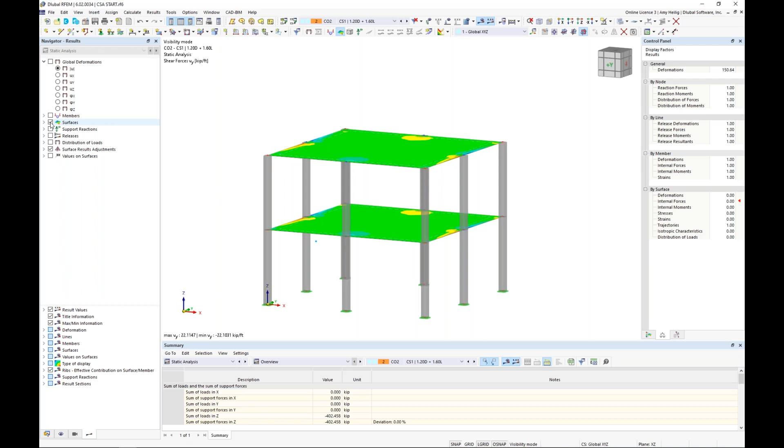That is essentially the analysis with these construction stages, but I would like to show you how to incorporate the design with these stages as well. We can activate the design add-ons by selecting it within my drop-down box in the table. We see here concrete design, available because we activated the concrete design add-on within the base data at the beginning of the example. Remember how important those design situations are—they are absolutely needed here when we move on to the design portion of our model.

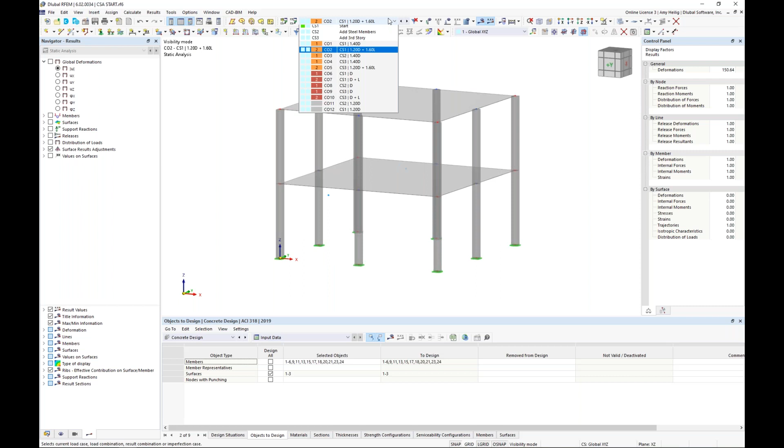So we have here our first LRFD design situation. We're going to select from our drop-down to relate this to the strength design for the ACI standard. Then I have my unfactored load combinations, which I'll relate to the serviceability design. Under my second tab, I select all of the objects I'd like to design—all of my concrete members, except for the rib element, which I'm not designing—and maybe I want to design all 3 surfaces. So that's what's currently selected here. I'm really ready to run my design as well, and I can choose this option here, show results.

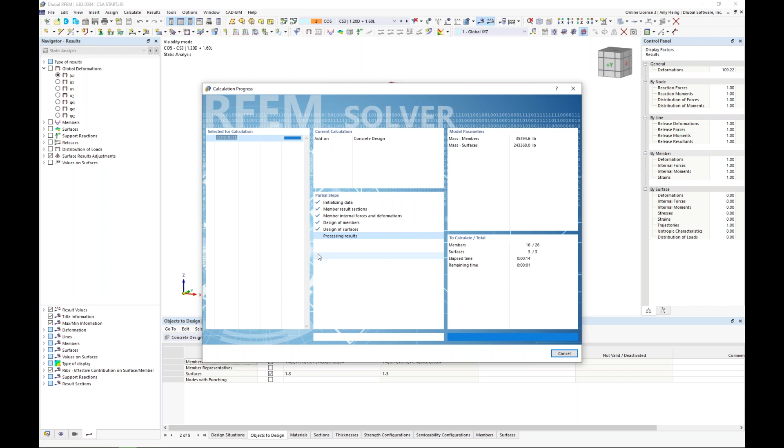Now, I already have my internal forces from all of the load combinations. They're simply brought into this add-on, and the equations from the ACI are applied. We consider the reinforcement to get our design ratio and required reinforcement for each one of these surfaces as well as our members. So once we are done with the calculation, we can view the design ratios on the surface, currently in table format.

Notice at the bottom, we can view the design ratios by construction stage. Here's construction stage number 1, and we can view each one of these checks. Notice we have a pretty high check here for our shear design, so we'd probably want to address the shear design for this slab right around where this column is framing in, but everything else looks okay.

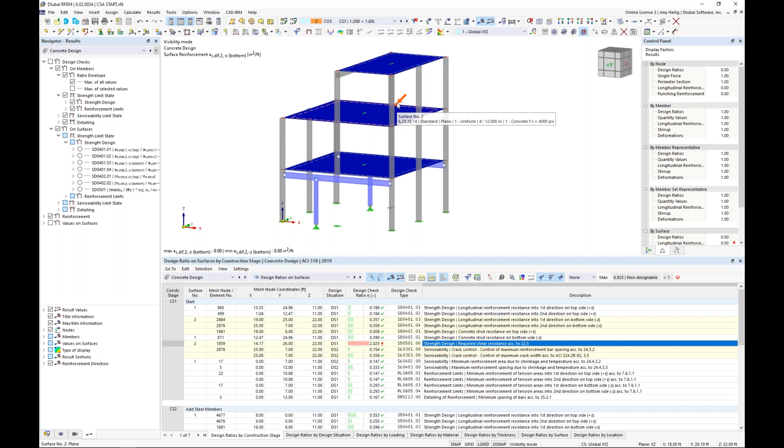We can also view the design ratios by the surface itself. You can see one of the columns here showing which construction stage this is applicable for, as well as the load combination. As we select any of these options in table format, what's new within RFEM 6 is visiting the design check details.

The design check details give us all of our variables in table format, and on the right-hand side, all of our equations. This one's rather complex, but if we scroll to the bottom, we'll show you how this design ratio is calculated step by step. We give you the code references in the right-hand column, and we also have additional code references in table format, trying to be as transparent as possible about where these calculations and code checks come from.

Notice here we have our drop-down — if we're looking at this particular location, mesh node number 2154, we can also select any one of the other construction stages if we'd like, and the program will automatically update our calculations to show for this particular construction stage.

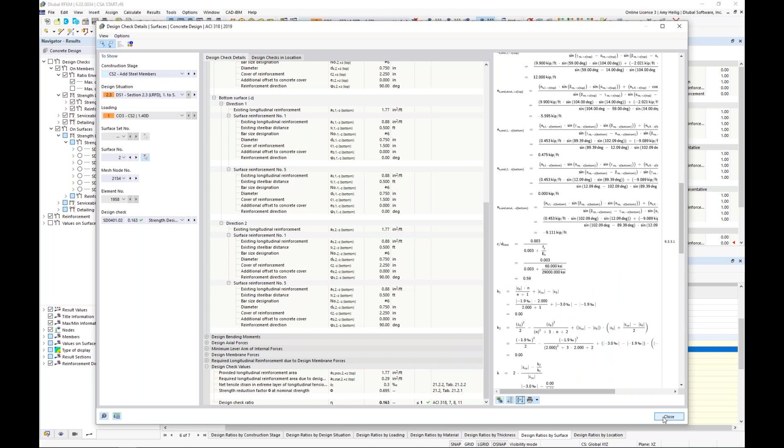Same concept here for our design ratios on our members. We can see design ratios by construction stage, and as we scroll through each one, we'll see all of the checks relevant to the ACI. We can also view, similar to the surfaces, the design check details. This one's a bit more simplistic for our member design, but the code equations and code references are given.

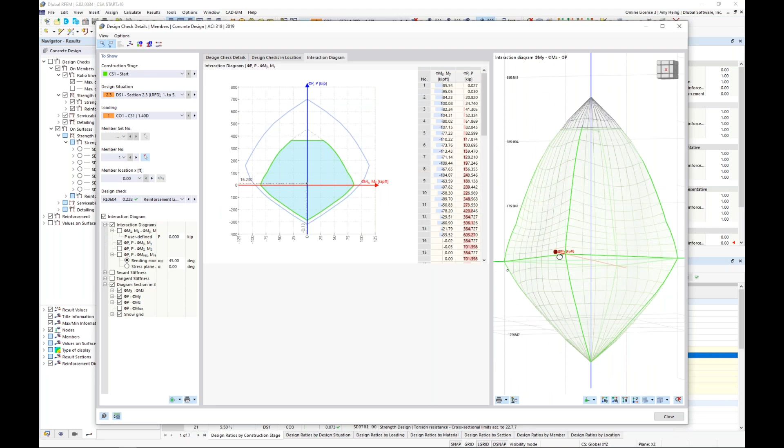Also new within RFEM 6 is we have added interaction diagrams for these concrete columns, so now we see the 3D interaction diagram and can see exactly where we fall for this particular member.

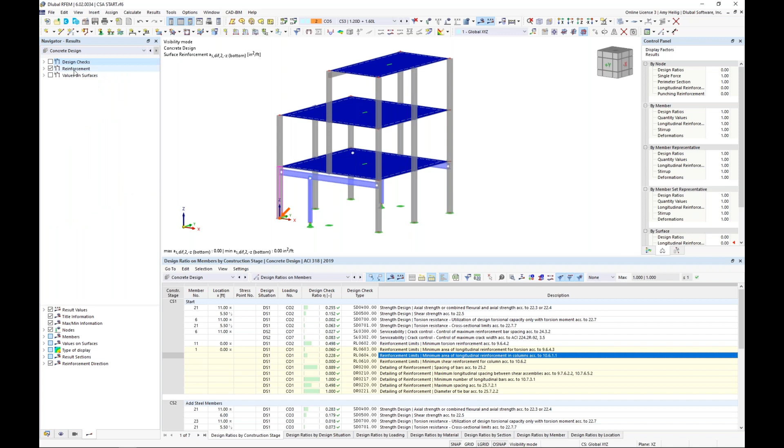Now we can export this information to Microsoft Excel, so table format is nice, but we can also view all of this information graphically over here on the left. We see now we're no longer looking at the static analysis, but the concrete design. If we right click to collapse these folders, we can turn on the design check of our members and take a look at the strength limit states and various checks shown here graphically, comparing this to our color panel, to see what's happening for these members.

So that sums up a quick introduction to incorporating the construction stages for the concrete design add-on, but let's briefly touch on the steel design as well.

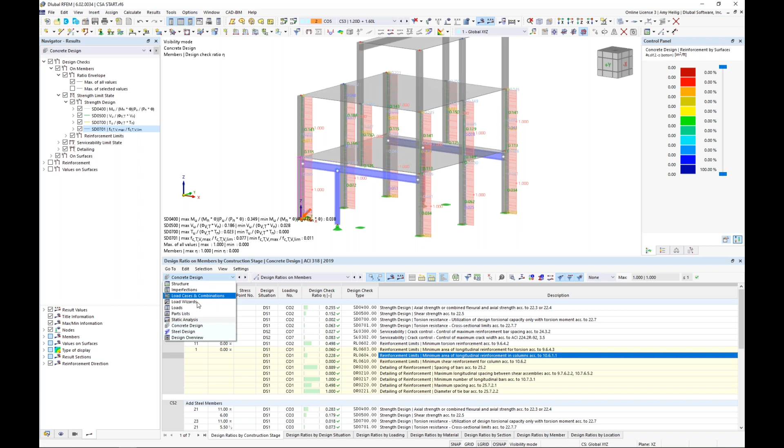Very similar workflow — under the steel design, we once again have our two design situations, LRFD and ASD, and we relate this to the strength limit state for our factored load combinations and serviceability limit state for our deflection checks under the ASD design situation.

Under the objects to design, this is where I could graphically select all four of these steel members. I click OK and run the quick calculation. Again, I already have the internal forces — it just brings them into the steel design and applies the AISC equations to get the design ratios.

So we can view the design ratios by construction stage. For construction stage 1, we shouldn't have much available since those steel members didn't exist yet, but for construction stages 2 and 3, we see all of the relevant checks shown here.

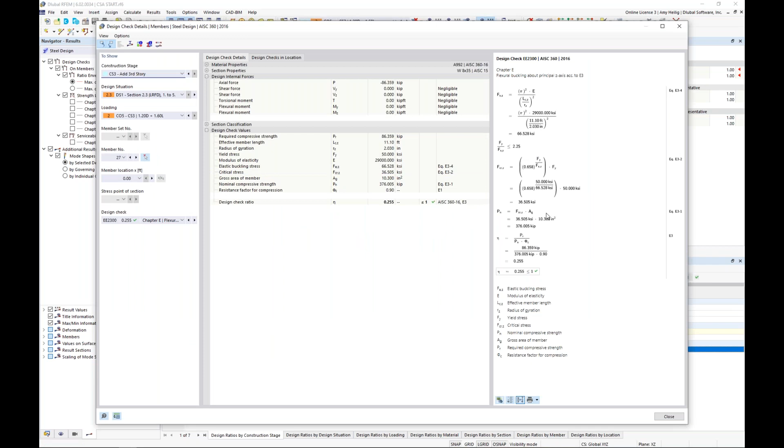You can also use the filter options, and if you don't want to see every single chapter for each member or construction stage, you can filter to the max option to see what's actually controlling for each construction stage. Similar to concrete design, we can visit our design check details, seeing the code equations and code references directly from the AISC 360, along with all of our information presented in table format.

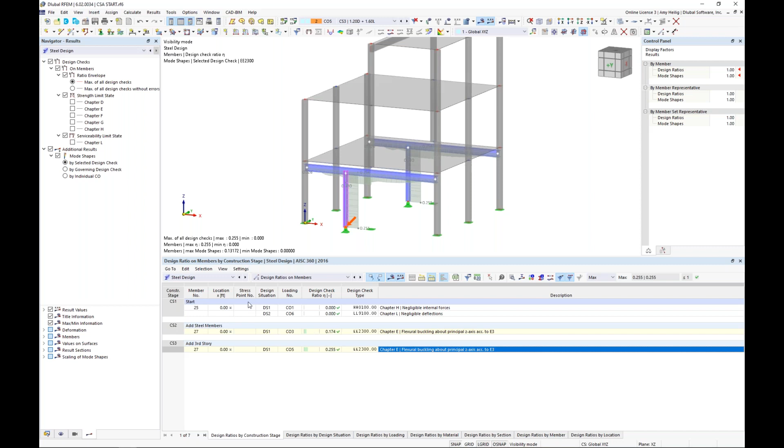Okay, so this will sum up the example today where we modeled the entire structure. We created those construction stages not only for the model where we deactivated elements and activated other elements, but also the loading considerations where we need to factor in the construction stages for the load combinations and design situations. And finally, we saw how we can incorporate those stages into the additional design add-ons. Keep in mind, it's not just specific to concrete and steel design, but we could incorporate this into our form finding add-on, aluminum design, timber design, and so on. So we'll go ahead and revisit the PowerPoint.

I did just want to touch on a few future developments that we can expect with our construction stages analysis. We recently added in RFEM 6, which we already had in RFEM 5 - it just took a little while to get them into our new version - line, surface, and nodal releases, and these will eventually be added to the construction stages analysis consideration. Remember, all of those options to turn on or off for activation or deactivation, we'll add in these elements as well.

I had already mentioned the stage analysis via load cases and results combinations utilizing linear superposition. This will be extremely helpful for large models with many load combinations, rather than having to factor in these construction stages for each load combination. We can superimpose the results on the final structure to consider the stages. So this will be really helpful for improved performance.

We also will be adding what we call phased massive cross sections and surface thicknesses, so we'll be able to activate the element parts step by step. For example, if we would like to increase the dimensions of a concrete column, we'll be able to take into account those phase activations within the construction stages add-on.